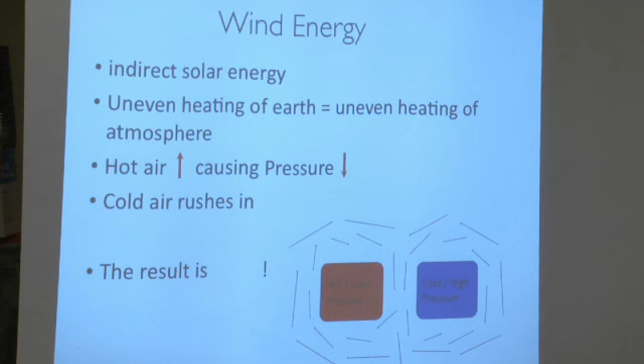So that's what's going on there. And a lot of confusion sometimes happens - a lot of people see these turbines, or not turbines, but mills on farms, and it's confusing. Like, what's this versus this? Is this just a junky version of this?

The difference is, if it's a mill, it's extracting mechanical power, versus a turbine extracting electrical power. So these mills are very high torque devices that move relatively slowly in terms of rotation and are used to do things like pump water or grind grain.

They've been around forever. They're still really common in the US and many places for pumping water. If you drive across the country, you'll see these everywhere. And they're still in use - much cheaper to build a mill than a turbine because you're going from mechanical work to mechanical work. That's very direct and much cheaper than the extra steps to get from mechanical work to electric power generation.

So a wind turbine, in contrast, is electrical power. They've been around a long time too, but not for most of humanity - long time. And again, they're going to be moving very quickly at much lower torque.

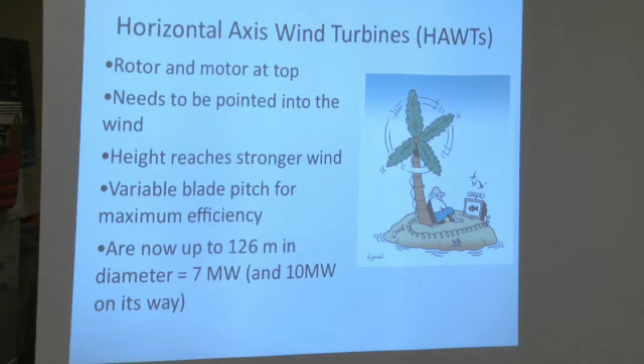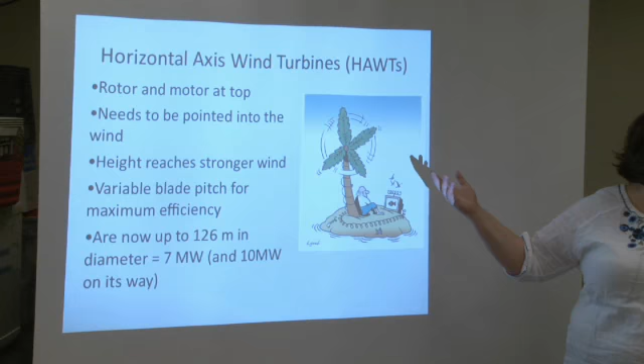So wind turbines I'm going to focus on, but I will go back to windmills a little bit at the end. You have two types: horizontal and vertical axis. The horizontal axis is what you're used to seeing around here, and what's in the news a lot, because they can go to much higher heights, and wind is much better the higher you go, basically. So the horizontal wind axis turbines are the more common thing, at least in my knowledge, before I started doing any research into them.

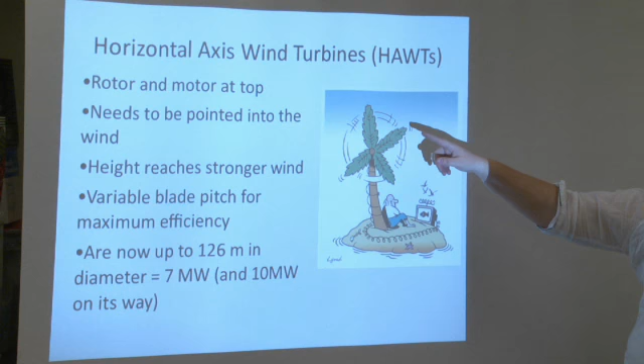So there's the rotor and the motor at the top. It has to point into the wind. The higher you go, the better, but you can imagine the higher you go adds costs and difficulty. You often try to change your blade pitch to maximize efficiency, because depending on how fast the wind is, you want a different blade pitch. And they're now really insanely huge.

Some of the challenges you can imagine in building this thing is just getting all the materials to the site, because you're probably not going to build your manufacturing plant where you build your long blade right on the site where you're going to install your turbine. So then you have to get your blade there, and you're actually limited by the size of a train railroad car or a large truck or whatever. So there's all these crazy limits when you're getting up to be this enormous.

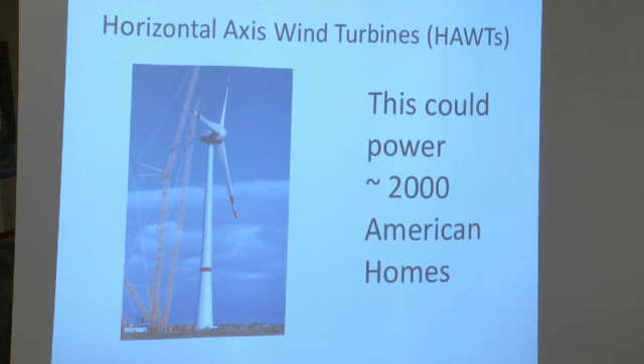So it's kind of remarkable and challenging, and this is of a scale that we're not going to be touching, of course, but it's nice to sort of see the extreme of what is out there. This is a 7 megawatt turbine that's actually running now, I believe, and they're currently building a 10 megawatt that'll be in production in a year or two. So that's a pretty big jump, 7 to 10. Yeah, it's definitely an area that's taking off.

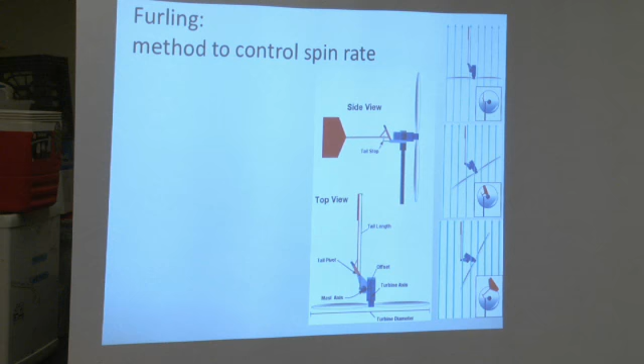One thing to think about is the need to control the spin rate. On days where there's not much wind, you might want to change the pitch of the blade to make sure you're maximizing the wind you're capturing. But on hurricane days, you have to make sure that your wind turbine doesn't completely just spin out of control. And so this is a really nice, relatively simple way to do it.

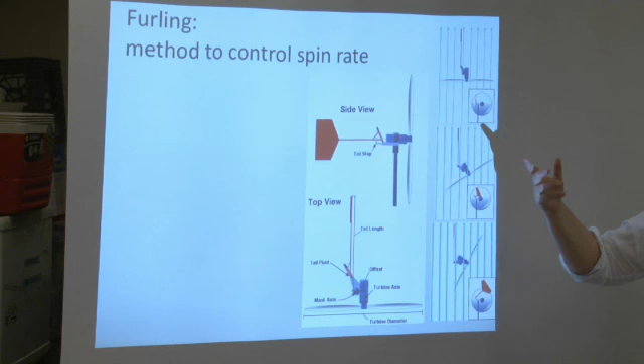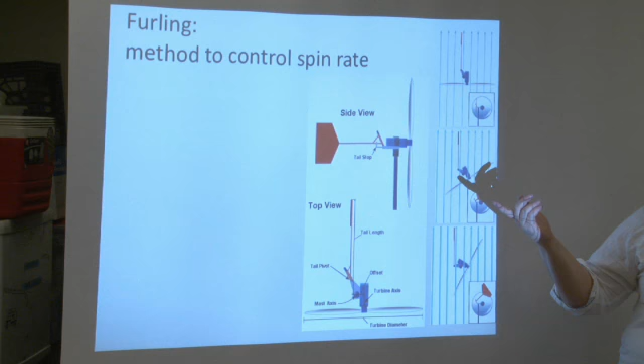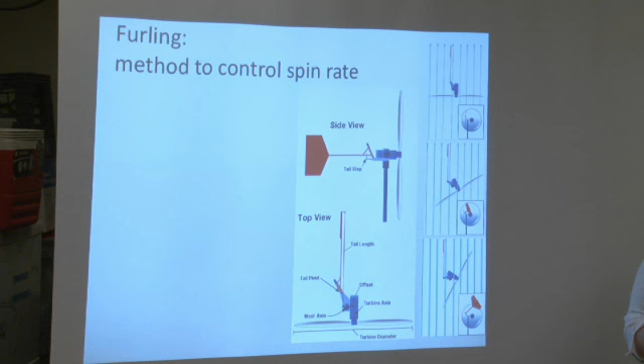So you can do it mechanically, electrically, or manually. Old wind turbines from windmills 100 or 200 years ago, there was some poor guy whose job it was to turn the turbine into the mill, into the wind or not, depending on how fast it was. Thankfully, there's been ways to optimize that either mechanically or electrically.

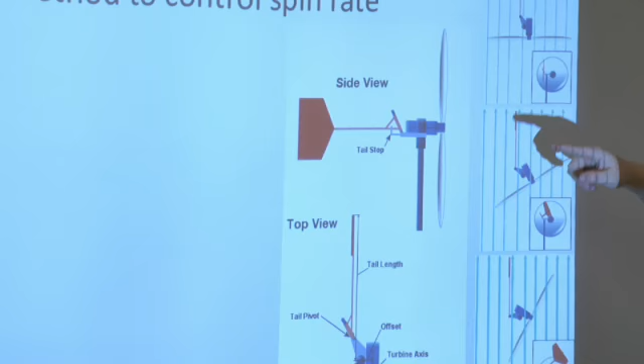This is a method where basically the weight of the tail and the turbine allows the tail to stay connected to the turbine - I'm getting lots of confused faces, so I'll go slowly. The turbine generally has a tail that's exactly perpendicular, so this plane and the plane of the tail are perpendicular.

So that the tail makes sure it's always pointing into the wind, which is what you want, except when you're going too fast. Now you need the tail and the front of the turbine to not be perpendicular, but hypothetically, if you're in gales, you need it to be completely rotated, so that the wind is just passing by the turbine.

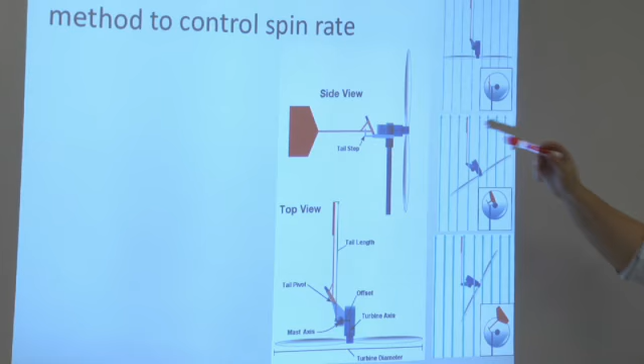Or if you're in a moderate wind where it's too fast for the turbine but still usable, you want it to be off a little bit. The way this works is that when the wind speed gets high enough, you get some lift in either the tail or the turbine - I forget how it operates exactly - and that allows this tail stop to be disengaged.

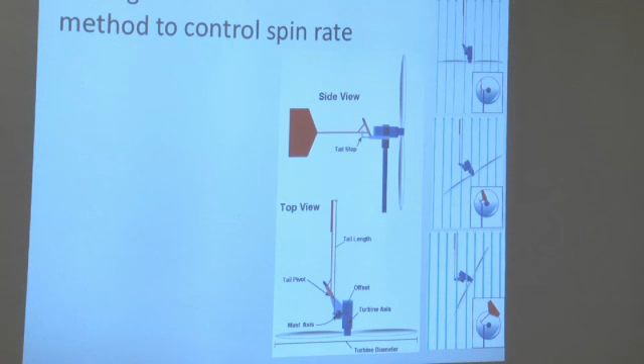So then the turbine rotates a little bit, which you can see from this top view - these are the front views, and this is the top view. The turbine rotates a little bit, and then the weight balances out, so the stop engages again, and it maintains this angle of orientation. Then if the wind speed gets even higher, the weights will get out of balance again, things will lift, and the stop will disengage.

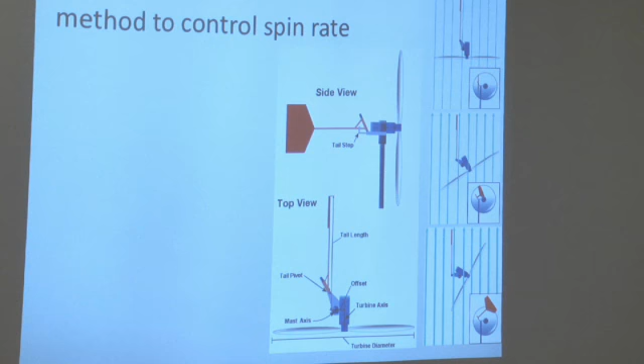So it's a really cool system to keep your device safe. And there's a lot of them out there.

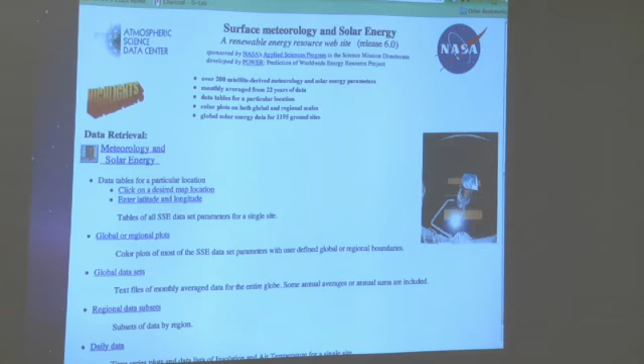And so I just wanted to show an example of what happens when you don't include that, or don't do it right. So watch carefully.

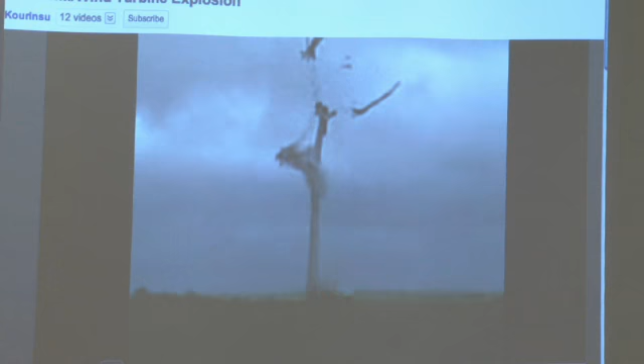So what happened, did the blade just fall off? It rotated so fast that I believe one of the blades broke off, and once one breaks, the whole thing is totally out of balance and falls apart. It's moving at such fast speed that really crazy dynamics are going on.

So there are really solid reasons to design these right, especially at big scale. But even at small scale, you can imagine in a hurricane it's not going to be safe to be near, and the small ones are often near people.

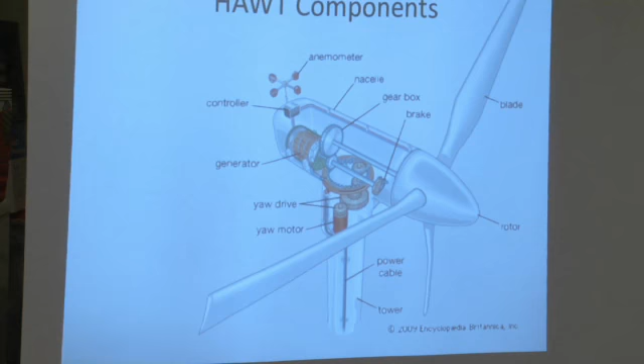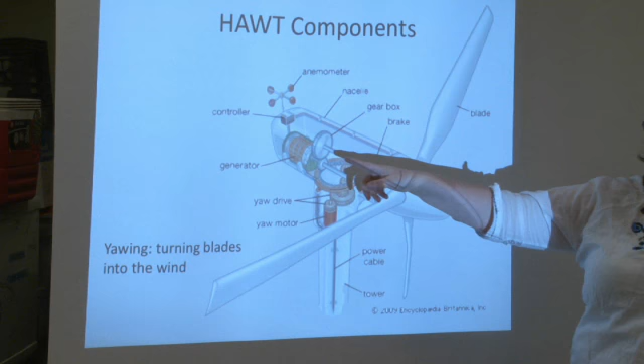So the typical components of a wind turbine: you have your rotor, your blades, and a brake, because you want the turbine turning at a certain speed ideally, so you may need to provide braking before providing rotation out of the wind. That's another smaller step you can take. You have a gearbox to get the speed to the right speed to power your generator.

Typically on a fancier wind turbine, there's an anemometer that provides the electrical control with yaw drives and motors to rotate the turbine into or out of the wind to maximize its speed, and then your tower. All the electricity is generated in this part of the body, and the power goes down the tower.

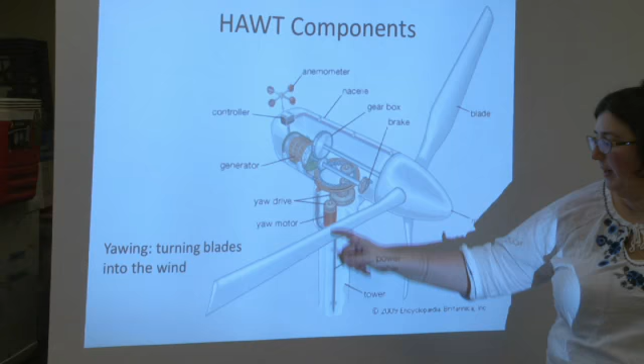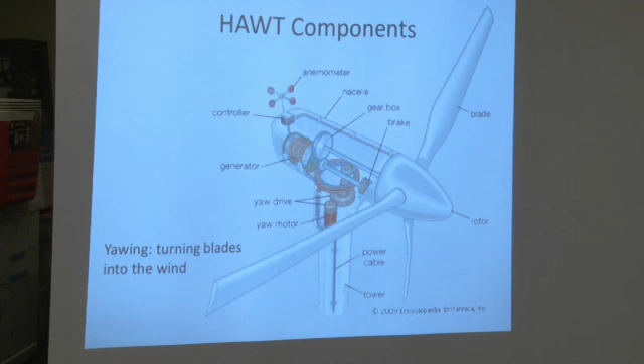You can imagine the challenge when you need to do maintenance on something really high up. So the smaller turbines we'll be looking at are all on guy wires and a pivot, so you can rotate them down instead of climbing up to do maintenance, because that requires a much sturdier tower and is a much more dangerous job.

Some installation considerations that one would think would be obvious but aren't always. This is a wind turbine installed basically on a rooftop, near some trees, so it's got two types of objects blocking the wind entirely. This was a many-thousand-dollar installation that's probably providing zero electricity, because the wind may be sufficient 30 meters up, but right there it's never going to be sufficient.

30 meters, or 30 feet—a good rule of thumb is you want your turbine to be 30 feet above any obstruction within 300 feet. Obstructions include things like houses, plants, and anything else that might be in the way.

Next up is vertical axis wind turbines. You can see there's a huge range of them, and you probably haven't seen most of these in production because they don't have the same efficiencies and benefits that horizontal axis wind turbines have, but they're a whole lot cheaper and easier to build, so for small scale solutions they can be really ideal.

There are a bunch of different names for these types. For example, this is called a Darrieus wind turbine. This is a Savonius wind turbine, which you'll be building on Friday. And this is a cool combo Savonius-Darrieus. The Savonius will start up automatically in wind, and the Darrieus won't, but the Darrieus gets a bit better efficiency, so combining them gets you the best of both worlds, with some drawbacks too.

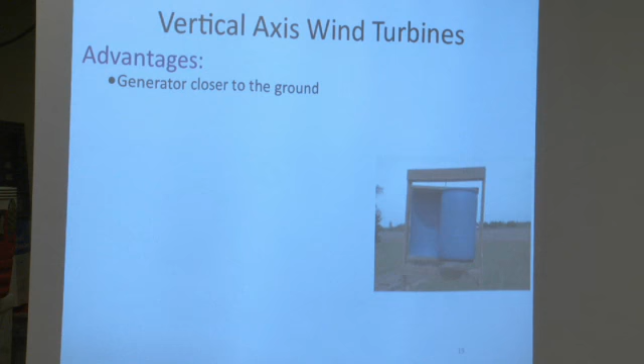So these power traffic lights in Taiwan. There are places where these are installed effectively, and they're kind of cool, because as you can see here, you can almost build them out of anything, and you will build them out of anything on Friday.

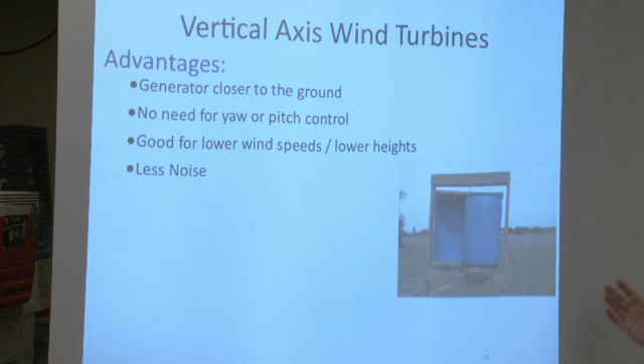Some advantages: they're close to the ground, so you don't have line losses compared to horizontal axis wind turbines. You don't need any yaw or pitch control because they're just in the wind—they're intended to be in the wind, and that works. They work generally for lower wind speeds, which means lower heights. They're often much less noisy than horizontal axis wind turbines, and they can often start at lower speeds.

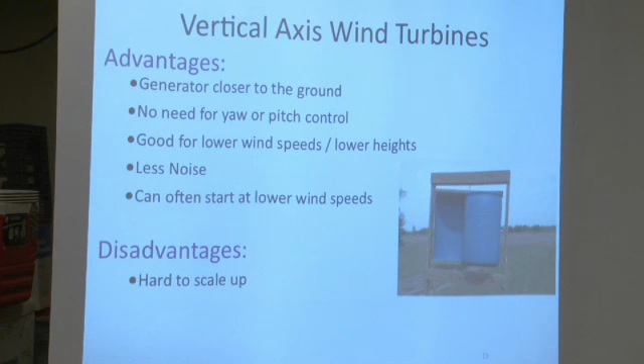Some of the disadvantages: they're hard to scale up. You're never going to get a 7 megawatt vertical axis wind turbine - that's just not viable. They're generally less efficient, and they're more prone to fatigue, so they wear out more easily because they're capturing so much more of the wind typically. But for our purposes, they're definitely a possibility to look at.

Just a reminder of the equations we're thinking about. The power you're receiving is equivalent to 1/2 times rho times A times v cubed. So v is the velocity of the wind, A is the cross-sectional area swept, and rho is the density of the wind.

The maximum possible power extraction is dominated by the velocity cubed. So your wind velocity is really what you worry about when you're designing. Area is important, obviously, but since velocity is cubed, the wind speed is huge.

Whenever you're thinking, is this a place where a wind turbine is appropriate, the first question is: what's the wind speed? And then there's a coefficient of performance, which reflects the reality that wind turbines are not perfect. There's a hypothetical limit - if you Google the Betz limit, you can find the proof, which is kind of cool - of almost 0.6 as your hypothetical maximum efficiency.

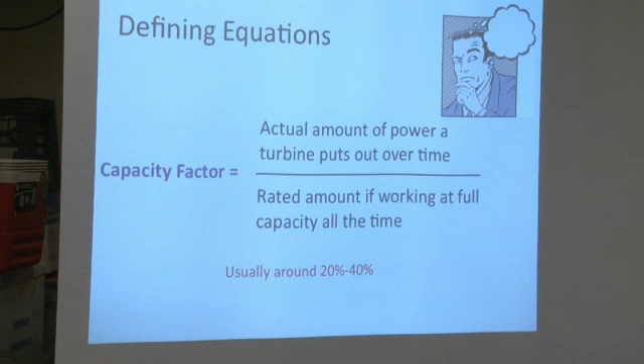The other equation to think about is the capacity factor. I've seen some websites say wind is so much better than solar because wind is 24/7. Well, not really - unless you're getting way up into the atmosphere, and even then there's a lot of variation. Wind is not 24/7; there's a tremendous amount of variation. Generally 20 to 40% of the time is how often your turbine is generating power, which is starting to sound more like solar actually. That's one thing to definitely keep in mind.

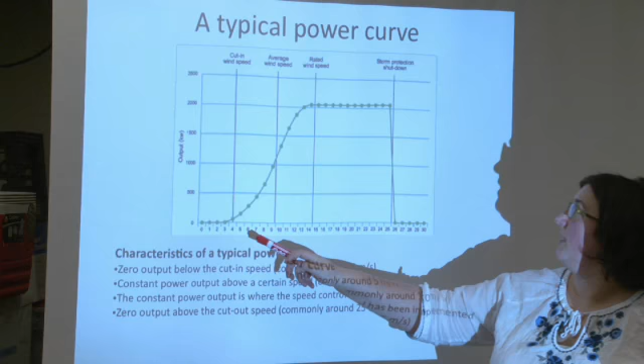Okay, so a typical power curve: at some given speed is when the turbine starts actually turning, because up until then it can't physically turn since the wind forces aren't high enough. Your output in terms of power is very, very low at first. Then you have an average wind speed generally somewhere around here, which gives you half of the wind power, or the power that you'd like.

Then you have a rated wind speed, and then you're happy, and then at some point it gets so high that you have to shut the turbine down, or else you're in trouble. So that's just a good general way to think about what's happening over different speeds, because I'll show you later we're going to look at data that shows the different speeds.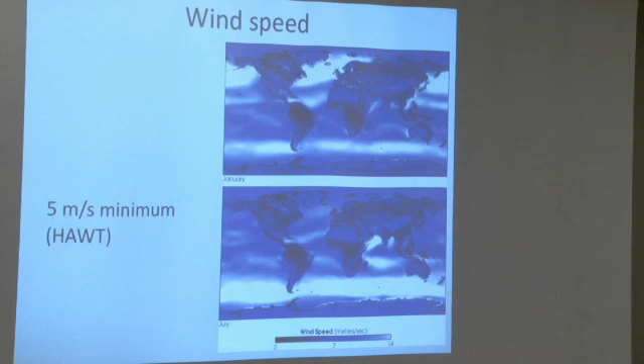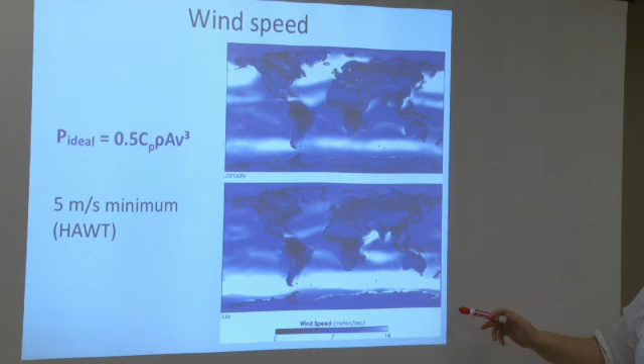These are maps from NASA that show wind speed across the entire globe. If it's very dark, it's very low wind speed, and if it's very light, it's higher wind speed. If we could just fill this part of the ocean with wind turbines, that would be pretty sweet. But you can actually see in Nicaragua, right over here, you're getting pretty decent wind compared to, say, these parts of Africa or up here in Russia, where we wouldn't be thinking wind turbines at all.

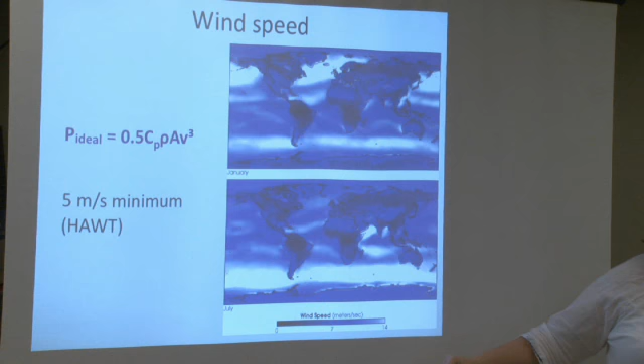You can see how much variation there is between January and July, so there's a lot of seasonal variation no matter what. This blue is 7 meters per second, which is getting to be useful. For a horizontal axis wind turbine, you need 5 meters per second. For vertical, you can go a little bit lower, but 5 is a good rule of thumb.

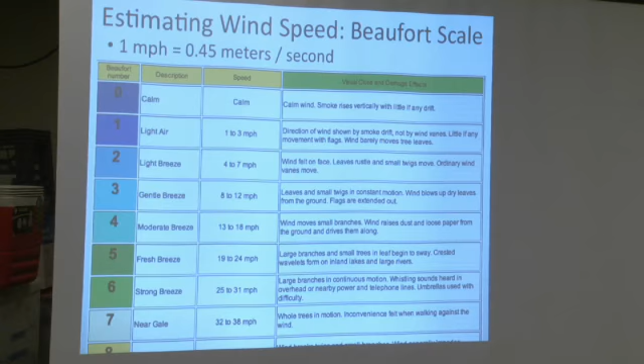Again, why we're looking at velocity over everything else is because velocity is cubed for your power equation. So, I've told you wind speeds, I've shown you a NASA map of the entire Earth, but that doesn't tell you much for a given location.

So one way to get a really rough estimate of wind speed is this Beaufort Scale, which was developed in the 1800s, and it correlates what you can visually see and what kind of damage you're seeing to the speed. Some caveats: number one, it's pretty rough, and especially if you're talking to people in a community asking about wind speed and giving them examples, it's hard to remember exactly what the wind is like. Can you tell me what the Beaufort Scale was today walking here?

I can't, I don't remember, I don't really pay attention to the wind that much. If you're working with farmers, they're probably a little bit more aware of it than you and I might be, but still it's challenging. The other thing is that a lot of these metrics are on the ground, and we're probably talking about significantly higher than the ground, depending on what kind of turbine you're implementing.

And so that only helps you so much. If you're finding out that you're probably at 4 miles an hour, which is 2 meters per second, and really low, but that's at the very ground level, and you're building a turbine that's 10 meters up, maybe 30 feet up, maybe you have a shot of getting enough wind.

Is there like a uniform scale from what the wind speed is at ground level to how it changes vertically? Or is that a regional thing? Well, so it's both.

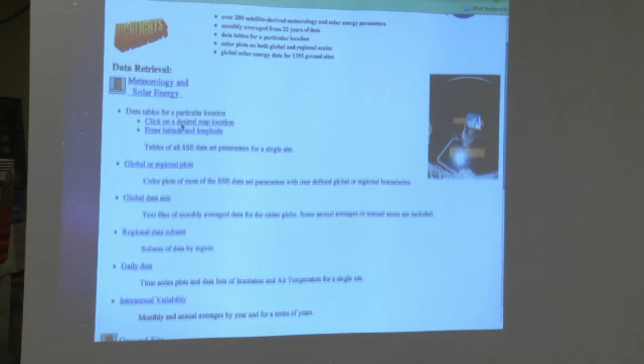You go to this website with that awful link, and there's a bunch of different ways to get this data. This is actually useful for both solar and wind. So if you're worrying about solar data too, this is really useful. If you don't know your latitude and longitude, you can use the map to click. Every time you do this, you have to log in, but it's very easy to join because you just type your password twice instead of once to become a member.

And then it's slow, but it looks so clunky that I was afraid you'd be turned off by it, and it has good enough data that I wanted to go through showing you it. So you have this map of the Earth, you click in the part of the Earth that you care about to center it, and you click to zoom. We're in the wrong part of the world, but we're getting there. I'm going to zoom in again. All right, and you can see this is data for a region, not for a small town. So there's all sorts of limits to this data, but it's useful.

Now you can finally get your data, and now you can get crazy information. So parameters for solar cooking, for solar panels, cloud information, which can be really useful, temperature, which can be really useful, and now we're getting to wind. So you can see the variety—you can get 50 meter and 10 meter data, but because this is all satellite data or airport data, 50 meters is pretty high for anything we're talking about, and 10 meters is for terrain similar to the airport, because they're measuring at the airport where they have anemometers.

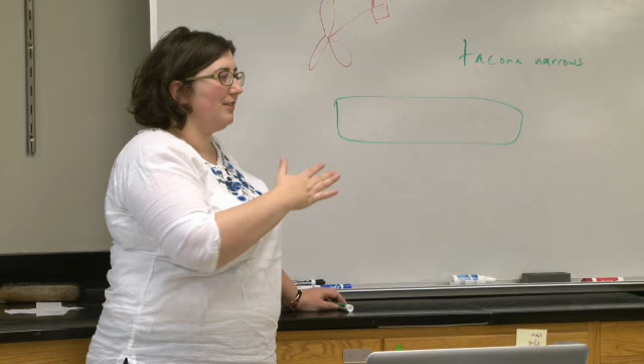It is totally scary, especially because I have a friend who did some research into it. This bridge, there's a super long bridge, and it just had natural frequencies at the same rate as the wind was often blowing, and so the bridge would just go up and down crazily, and eventually one day it got so bad that it completely broke apart. The crazy thing is that people used to hang out on the bridge on the really windy days because it was so fun, like a roller coaster. So it's extra scary thinking about that.

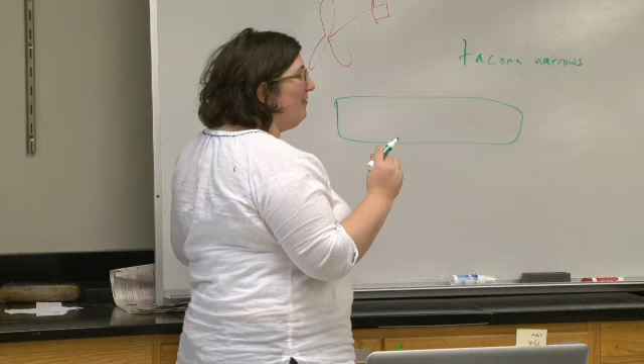Anyway, this was the inspiration for the Humdinger, which has a really tightly pulled belt in the middle of a support structure, so that the wind is going perpendicular to the belt, which hits the natural frequencies of the belt and causes it to vibrate. Then you just have some magnets next to a coil on the corner that allow you to generate electricity.

For certain applications, this can be a really low cost way to provide electricity. This is a relatively fancy way of building it, but you can imagine, and they have, building it out of PVC pipe, which you can get anywhere, and building it really simply. Because there are very few moving parts and nothing rotating, it's much easier to build than even a vertical axis wind turbine. It's a really neat application, and hypothetically you could imagine building it into structures like railings on buildings and stuff, in order to power different things. This is one example, and we have at least a couple at D-Lab, so we'll make sure to show you them later today or tomorrow.

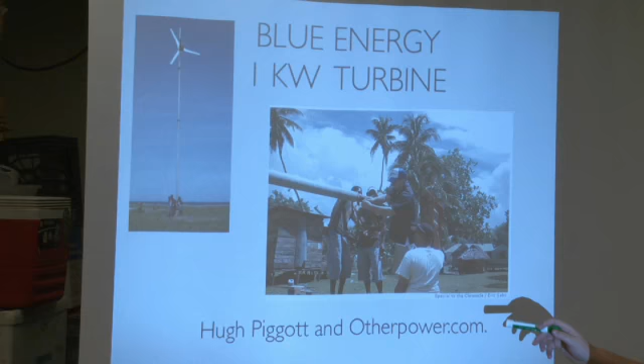Another example is the sort of classic wind turbine in developing countries, designed by Hugh Piggott. These are pictures of work being done at Blue Energy, in Bluefields, Nicaragua, which we worked with last year. They build all these turbines - you can see the support wires, and that you can rotate the turbine down so that you can do maintenance on it, which is a really nice feature. That's one classic design that's pretty common in developing countries.

And then a lot of people have heard of William Kamkwamba. Oh, there's the wind belt - so let me go back to that.

So I'll pass this around, and the belt is not exactly taut at the moment, but you can see the magnet on the belt that goes against the coil, and that's really all there is to it. Then there's a little bit of circuitry in order to generate power, which is a really simple way to do things. So what's the idea? The wind goes through the tape there, and the tape vibrates because it hits natural frequencies, and the vibration allows you to generate electricity. This movement is all you need.

So William Kamkwamba was this guy. Where did he live? In Malawi. He just got really interested in how he could get electricity at his house, went to the library, read a bunch of books, got inspired, and built his own wind turbine, which doesn't look like your traditional wind turbine. There are a few design improvements that could be made, especially with better resources, but it worked well enough for him to power a radio at his house and charge cell phones, which got people really excited, so then they would start paying him so he could start building more and more turbines. It's a really cool story, and now he's at Dartmouth in school, which he never could have done had he not built this turbine. So he's a cool guy.

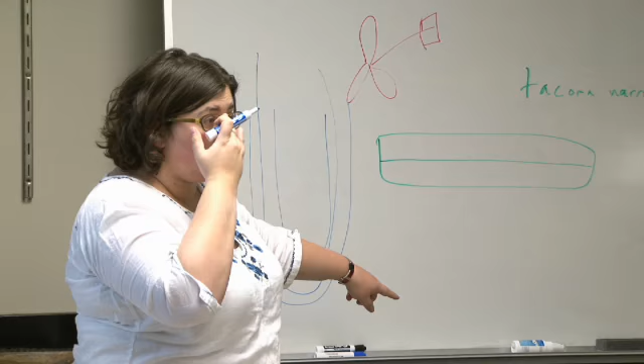So there's a rope pump here, and the way a rope pump works is incredibly simple. You just have a rope inside a tube that goes down into the water table, so that you're getting water through holes in the tube. Then you either have knots in the rope, or if you can find them, rubber washers, like every foot along the tube. This is obviously not to scale in any way. The water gets trapped between the washers, and you pull up the water that way. This is really simple. Again, we're talking about ridiculously low efficiencies, but if you need to irrigate, this is a way to do it that just uses the wind and works really well. This was built for $40, which is ridiculously inexpensive compared to even a Hugh Piggott wind turbine, which is in the thousands of dollars.

So there are opportunities for a whole range of possibilities, and there are just so many different types out there. If you look into it, wind is one of the areas where people get really excited and like to build their own stuff, so you can see a huge variety of designs in the world. That's wind in a very fast nutshell. Are there any questions about that?

Okay, so next is MicroHydro. MicroHydro is kind of funny because it's harder to find really good examples of installations in the developing world, because they tend to be just built but not well documented, is what I'm finding. So I'm going to talk more about how you would determine if a MicroHydro installation would be appropriate, and I don't have as many good examples of successful installations, but they're certainly out there. Hydropower is just using the gravitational flow of water to generate power, considering the two terms I'm going to use, head and flow rate. Head is the distance that the water falls, and flow rate is how quickly the water is moving.

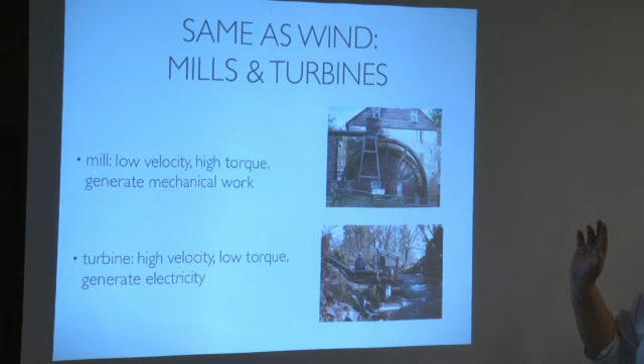With water power, it's the same as wind in terms of there being mills and turbines. Think of old grist mills and other things you can still see in parts of New England. They're low velocity, high torque, delivering mechanical power directly, as opposed to a turbine, which is much higher velocity, much lower torque, allowing you to generate electricity. Those are the two extremes.

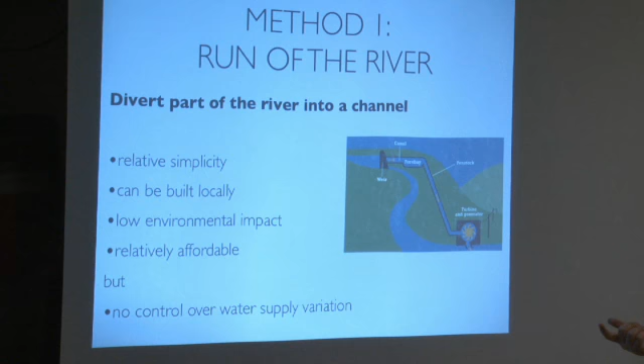In terms of hydropower, there are two methods. One is called run of the river, meaning you take a chunk of the river and siphon it off into a tube that goes directly into your turbine. The other option is a dam. The benefits of run of the river are that it's relatively simple - you can build it locally, compared to a dam which is much harder to build generally. It's comparatively much lower environmental impact than a dam, and relatively affordable. But when you have a drought, you don't have any storage like you have with a dam, so that's the drawback.

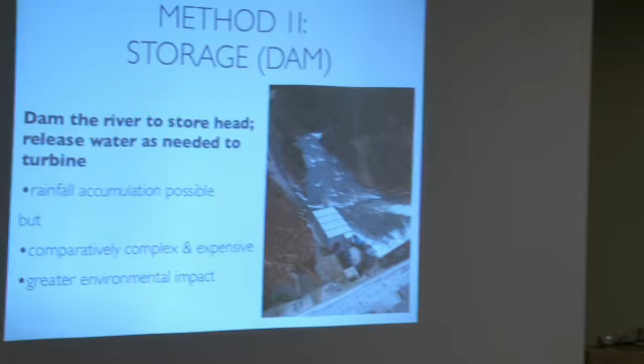The dam is the reverse - you can accumulate your rainfall, which is great, but it's relatively expensive, and there's a greater negative environmental impact, because damming up water affects the local environment, from the fish to what the fields look like, et cetera. I'm sure you've heard of dams in China or similar that have destroyed many entire communities for building dams on a very large scale. There's also more maintenance associated with the dam in terms of silt accumulation.

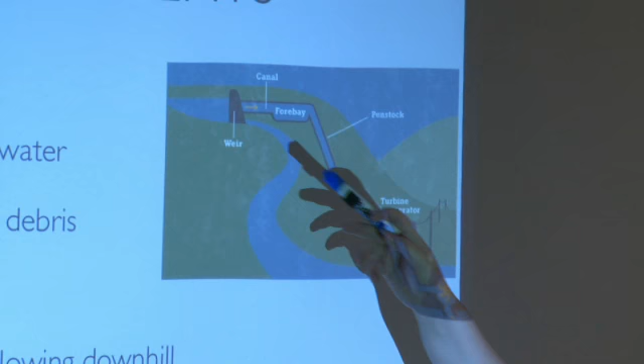It's challenging, so we're just going to talk about the run-of-the-river model. The components you have: a weir that diverts a chunk of the water into your tube. You generally have a settling basin so that any debris settles out, because you don't want it going into your turbine - you'll destroy your turbine. A forebay, which is a small holding tank, gives you reserve capacity, but that's talking about variation on the order of seconds or minutes, not days or months.

Penstock, which is a closed pipe flowing downhill that feeds directly into your turbine that then generates your electricity, and then the water is returned back to the river. There are a lot of different turbine types.

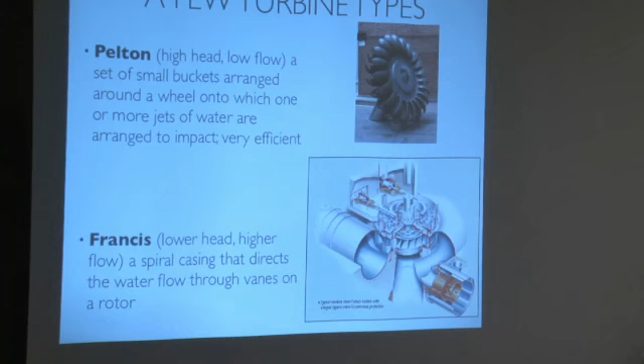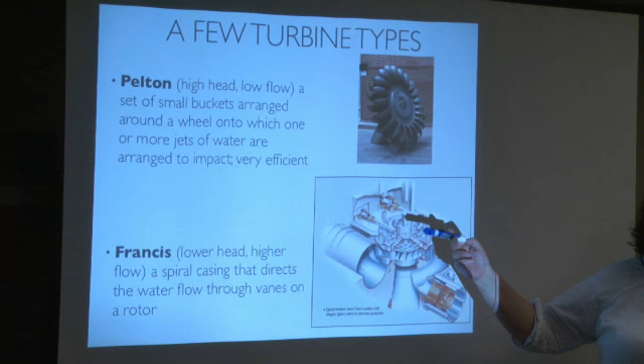One of the most efficient, if not the most efficient, is called a Pelton Wheel. You can see it's got a relatively complex geometry, so it's relatively expensive and challenging to build. But if you do, it's very efficient. It works well for a high head, low flow situation - head being how far the water is dropping.

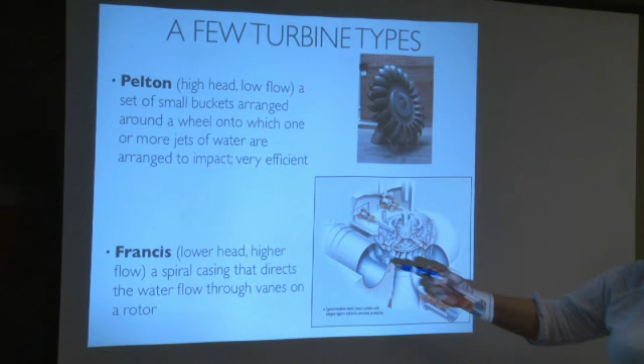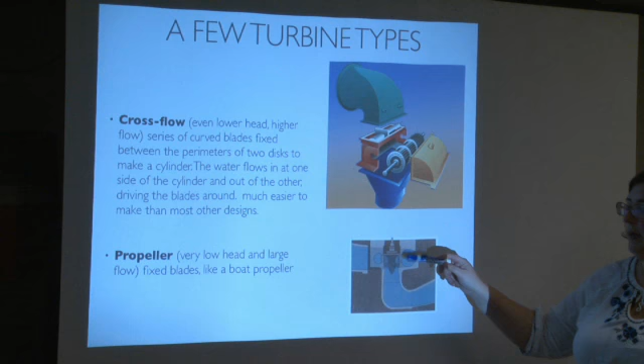Francis wheels work better for lower head, higher flow, with a spiral casing where the water comes in and spins the turbine, then comes out. Cross flow, where the water flows over a cylinder with a bunch of blades on it, spins the shaft to generate electricity. A propeller literally uses a ship's propeller, but instead of it being powered to move the boat, it's used in the exact opposite way.

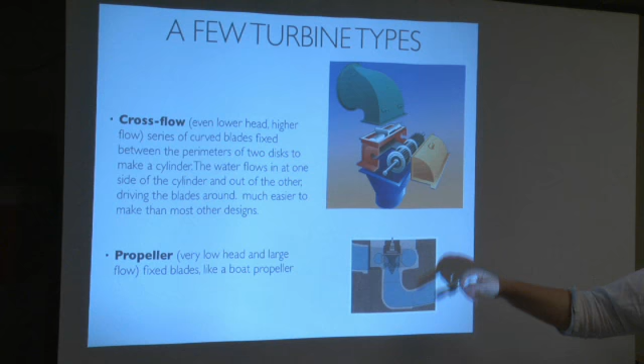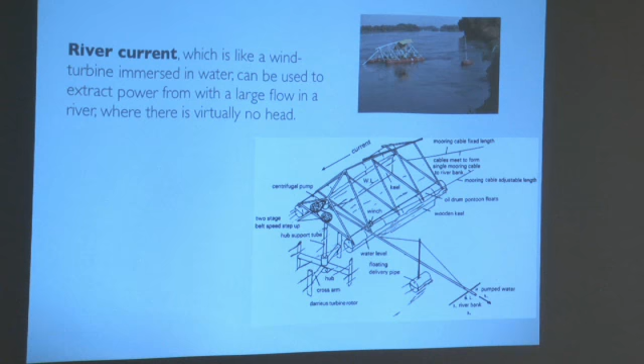You need different types of turbines for different flow and head situations. One example is just literally putting something in the river, skipping the filtering and siphoning, just putting something on top of the water - which seems really simple and great until you think about all the challenges in terms of flooding and debris in the water, et cetera. This is a device that is really prone to failure, but it works in areas where that's your only option, or it can work.

Some of the considerations you need for microhydro: the minimum head and flow you need is 3 feet of head and 20 gallons per minute of flow.

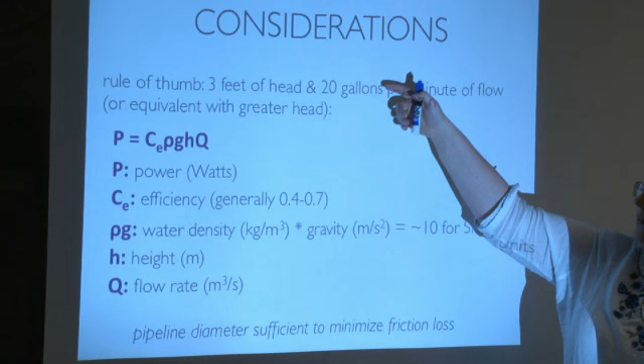So that would be the minimum head you need. If you have more head, either as a bonus you get more power, or you can have reduced flow, because the power equation here is a coefficient of efficiency times the water density and gravity times the height, which is your head, and Q, which is your flow rate. So you can see that H times Q you can keep constant. If you increase your head, you can lower your flow and keep your power constant.

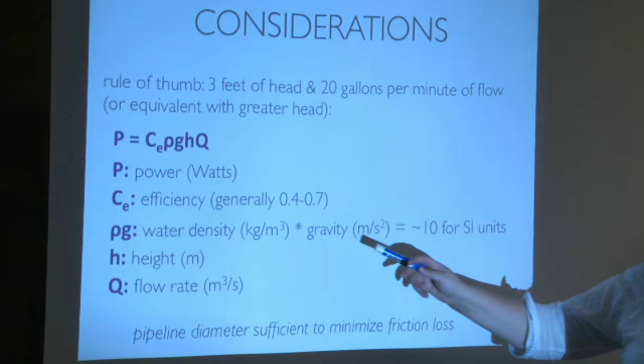One nice rule of thumb is if you stick with SI units, rho times G is about 10. So you can just plug that in rather than having to remember the density of water and gravity, though in SI units that's relatively easy, but 10 is a nice way to just remember it. And then efficiency is generally somewhere between 40 and 70%.

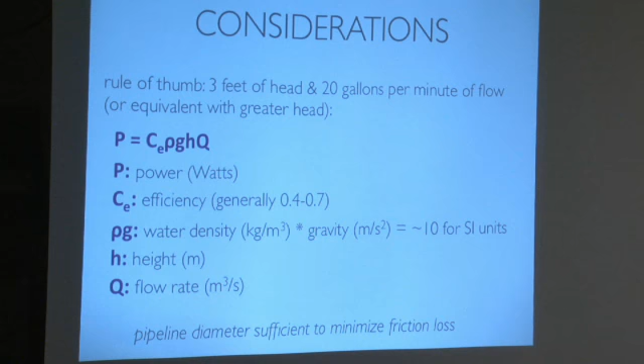One other thing to think about is your penstock, which is the water going through the pipe to get from the top of the river down to your generator. If your pipe diameter is too small, you're going to have frictional losses in the pipe that dominate and slow your water down so much that it's problematic. So that's another thing to remember, because it's tempting to use small diameter pipe for a variety of reasons, but that's dangerous.

So how do you figure out if a river is appropriate for using MicroHydro? The two things you need to know, again, are flow and head.

So the simplest method I can find for measuring flow is called a float method. You can imagine actually doing this in a river would be challenging, so it's not trivial, but it is possible. You mark about 100 feet along a length that's ideally straight with uniform width and depth, which is comical to find in a river, right? I've never found a river that has 100 feet of uniform width and depth, but you do your best. Then you calculate your cross-sectional area, A.

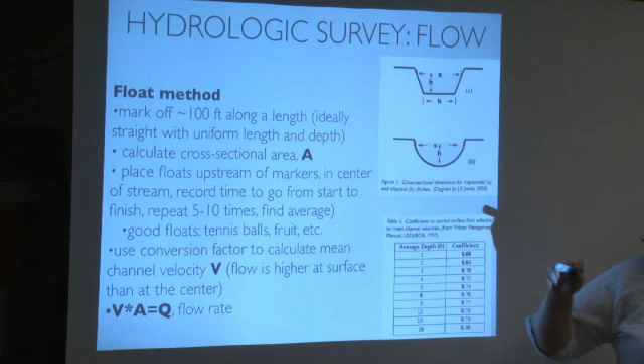People usually model it as a semicircle or a trapezoid or even just a rectangle. Calculate that cross-sectional area. You place a marker at the start and end of your 100 feet, and then you put floats in the river at the center of the stream and time them to find out how long it takes for them to get from one end to the other.

If you want to get complicated, you can put floats at different points and levels to worry about friction losses, but you don't actually have to do that to get a ballpark measurement. You can just do it in the center. And good floats could be a tennis ball, an apple, or whatever you can find that floats. You do have to use a conversion factor because your water's flowing faster at the top than in the center, because of the friction associated with the base of the river. So you use a coefficient to correct, and then you get your flow rate. Yay!

So that was a lot of work, and all you have is a flow rate for one day. Water flow rate varies tremendously during the season. So again, you can do your 10-year study, or you can just get some data on annual precipitation and when the rainy season and dry season are, and do your best to estimate. But yeah, that's how you'd get your flow rate.

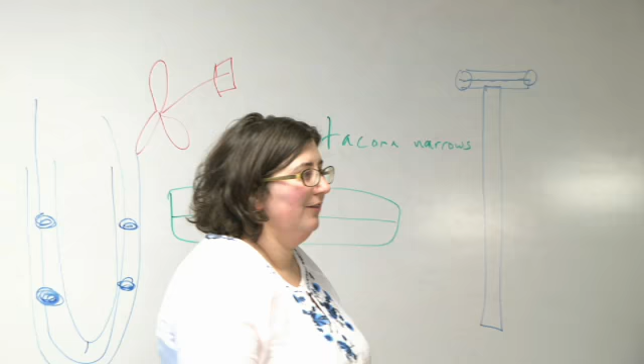In terms of head, the simplest method I found is you take a yardstick or a stick of known length, it doesn't need to be a yardstick, and you put on it a clear tube with the ends capped, half full of water, which is basically a really cheap level. Or you can get a real level if you have one, but if you don't, you can just use the cheap version.

Then, hopefully with two people, you put the stick at the bottom or top and keep moving it over and over again until you measure your head, which is a pain, but people do it and it works. Actual surveying equipment is really expensive, so you're unlikely to have that in the field.

So if a community partner asks about this, you have a method to measure that's plausible. Sorry, I thought the head was the drop into water.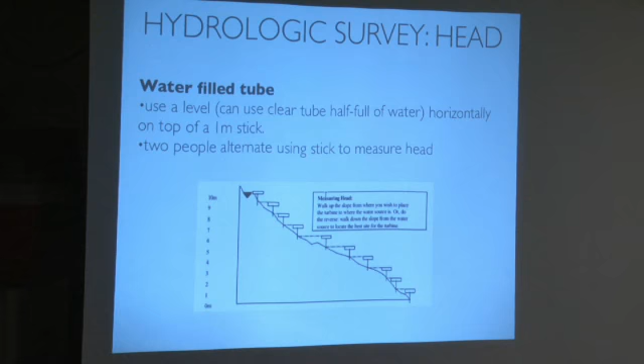Right, so you're putting this in the river perpendicular to the water flowing through. For the flow measurement, you're putting your floats in the water and watching how long it takes to get from one end to the other, and that'll give you a measure of flow.

And then your river ideally is, let me get a picture instead of trying to draw a bad picture. So your river is hypothetically going down the mountain here and doing a curve. And so you're saying, okay, I'm gonna put my weir up here, and I'm gonna put my location where I'm actually going to generate the power down here.

So I need to calculate the height from right here to get my head height. So now I need to very painfully go up the mountain in order to figure out exactly how high this distance is. Does that clear it up? Okay.

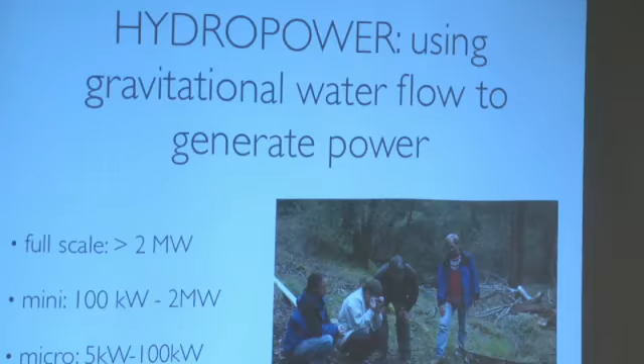So that wraps up MicroHydro. Are there any questions in addition?

Okay, so trip. I want to start talking about the trip and spend actually the rest of the time talking about it. So let's do that.

So one change is that one group of students is going to go to El Salvador now instead of Nicaragua. And the reason for that is Amy Smith just came back from a trip to El Salvador where she found a community partner that's really interested in us, and we think they're doing great work and are a solid connection.

So we decided to see if we could add Nicaragua or El Salvador, and we were able to in about 2 hours, which is remarkably fast compared to the months it takes to develop relationships with other community partners. So hopefully that's a good sign.

And they're really interested in charcoal, which is something you'll be trained in next week, so it just seemed like a good fit. You already know about this group, so I'll talk to you offline if you want about it. But yeah, we're excited to be working with them.

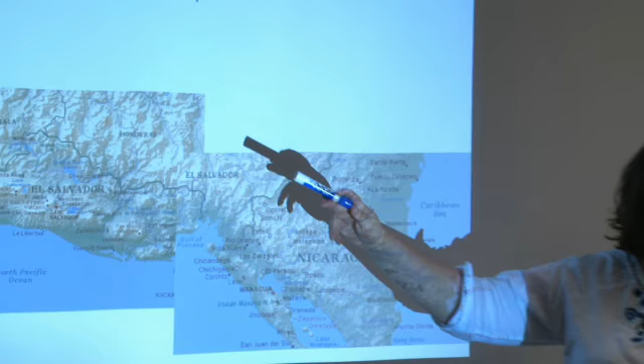So one group of students is going to be going to El Salvador, and then 2 teams will be going to Nicaragua. El Salvador doesn't border Nicaragua, but it's pretty close, so we're not that spread out yet. We're not approaching D-Lab development quite yet.

So the teams are as follows: ASAPROSAR will be going to... Bus, Rosser, and Brianna will be going to ASAPROSAR, and Carter, you'll be working with them for the start of the term.

I don't know if I've mentioned this, but the teams you go with and the projects you work on for the spring break trip may or may not be what you end up working on afterwards. What happens is the week after you get back from spring break, we figure out what projects are going to happen. You tell me what you prefer to work on, and some students are really psyched to stay on the project they went on spring break with, and naturally I'm going to try to make it possible for you to stay on the project you're really psyched about, especially if you're knowledgeable about it because you just went on a spring break trip.

But if for whatever reason you're like, you know, I can't stand ASAPROSAR, I don't want to work with them or any of their projects ever again, I'm not going to force you to stay on that. So there may be a little shuffling, especially for the people who aren't traveling, there's variation. And I'm pretty sure Eric has dropped the class, but if he hasn't, he would be on this group.

So the projects you're going to be working on: last year the students worked on the OJ bag sealer. One thing is delivering that bag sealer, which ideally means reading the final report from last year and learning how it works so you can show it to ASAPROSAR staff when you get there. That's sort of the servicey project as opposed to the investigative parts of the work. Then projects 1, 2, and 3 are the ones you'll be investigating.

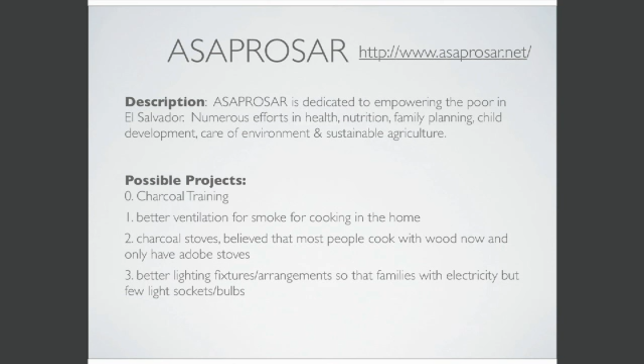Guess what? So yeah, we're excited about that project, and thanks to the people who are rolling with just being sent to a new country with very little notice.

So what do you have to do with all this? Right now, and by right now I mean in the next 2 hours, talk to me and do some brainstorming of ideas.

Your deliverable for this step is 2 annotated pictures from each team member. There are a lot of different deadlines for all these different things. I'm just trying to help you get through the next couple of weeks in a way that you actually get output and don't save it all to the last night, which will lead to really weak packing and help for your community partner. This is all hopefully in preparation so that you can maximize the value to you and your community partner for the spring break trip.

And for the people who aren't traveling, you're helping make sure they're maximizing their work, and it's also getting you prepared for doing the project work after spring break. So I don't think this is busy work for you in any way.

So that's one, doing a brainstorming effort, and I'm going to talk a little bit about brainstorming in a minute, so you have some guidelines there.

Pictures, you mean find examples of existing technology or do sketches? Just sketches. When you do a brainstorm, like if I was brainstorming wind turbines, I might do a picture that looks like that—takes me 10 seconds to draw.

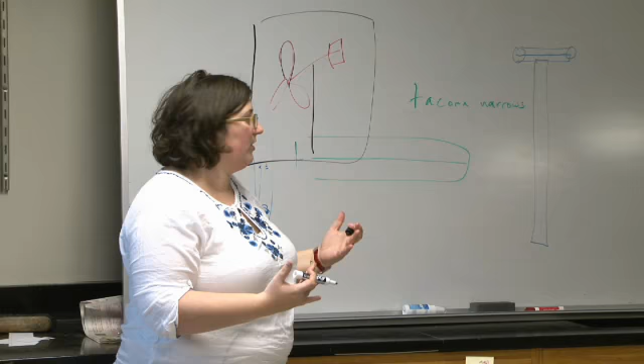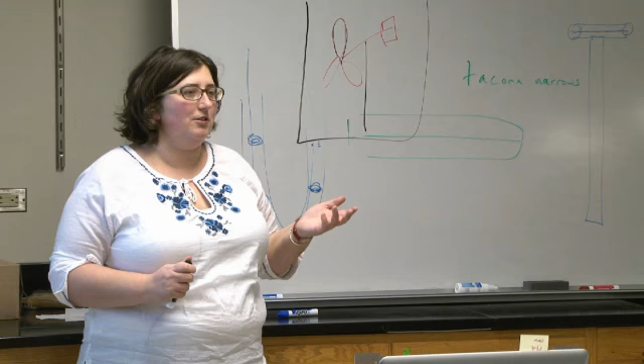Not many, if any of you, are artists or technical graphic designers, and so I'm not looking for an amazing sketch done by a graphic designer or artist. I'm not one either, but if you just draw relatively slowly and carefully, maybe do a couple tries, you should be able to get a drawing that looks decent enough that it's understandable, which is all I'm really looking for.

So the second thing is a literature search on the topic, which you may have time for as well. I want you to do a brainstorm initially just to get creative before you know what's out there necessarily. That's why we're doing the brainstorming first, but then a second set, which you may have time to do some today if you brought laptops, is to get some information on what's out there, so you're more informed about your project.

So what I think would be a good deliverable for this is an annotated bibliography, and there are guidelines right there on how to write an annotated bibliography.

The guidelines for annotated bibliographies are generally on the liberal arts side of things, and they talk about summarizing the content, reflecting on whether it was useful, and assessing the quality of the source. All those are good things, but basically I want you to focus on summarizing what was there and reflecting on how it's relevant to your project for each annotation, and assessing the quality of the source.

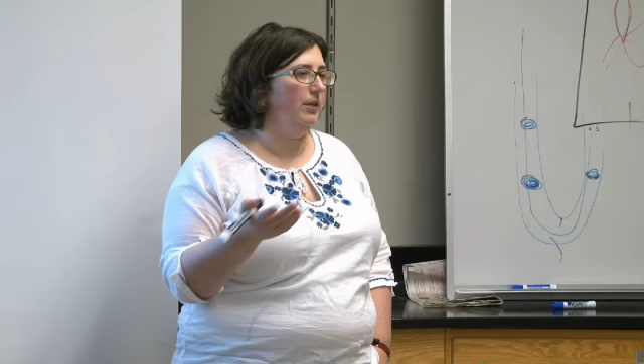Come up with the best guess so that when you talk to your community partner, who often don't have a lot of comfort with numbers and may give you really wacky numbers—if they're giving you numbers completely different from what you're expecting, that's a good indicator you need to keep asking questions, so either you learn your assumptions are totally off, which is important to learn, or that your community partner isn't really understanding the question or doesn't have the educational background to give you a useful number, and you have to work a few different ways to actually get to that number.

And we'll talk about that on the trip prep week, about how you actually do that process of getting that information.

And then the next aspect is doing a second brainstorm, and it's up to you as a team if you want to do this in two stages. Sometimes people like to brainstorm on their own for a bit and then come together and bring those ideas to a group brainstorm session, building on them further. Some people prefer just to do a group brainstorming session, so it's up to you.

But the second brainstorm should at least have a group component. For those, it's just two annotated pictures for each project, so it's fewer pictures because it's not per team member. You guys can figure out how you want to split those up.

Another thing is the big questions you have that you want to make sure you get answered, so keep those in mind and make sure by the end of the trip you've gotten answers. All of these questions relate to figuring out: can you actually work on this project? Is this a good project? And if you are going to work on it, what is the appropriate deliverable? That's the type of questions.

A materials list for the trip. You may well need some materials if you're going to do a charcoal demonstration, build a washing machine, or implement a prototype in the field. Your community partner needs to know so they can provide the materials, or we need to get them here so we can bring them down. You don't need this until the 16th, right before the trip, and that's only the last desperate time. If you can define them sooner, that's better, so your community partner has time to get them, or we have time to get them if you need help.

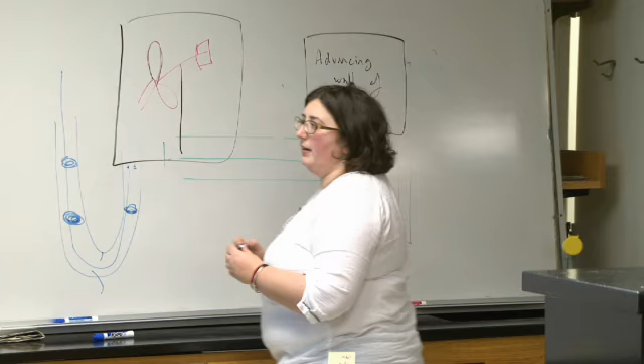So a lot of people, if they're brainstorming weapons of war, and you have your 8.5 by 11 piece of paper, might draw this. And I would say that this picture is a lot more evocative of what your idea is than using the words big and just a tiny drawing.

And those of us who are not so good at drawing, and I'm one of them, are tempted to draw really small because you don't want to show in really big format just how bad your drawing is. But even being a weak drawer, you can still get your idea across pretty well.

This is like a 3-minute sketch for an artist. So none of your brainstorm ideas are going to look this crafted. This might be the actual annotated sketch that you turn in, that you actually refine and spend some time on.

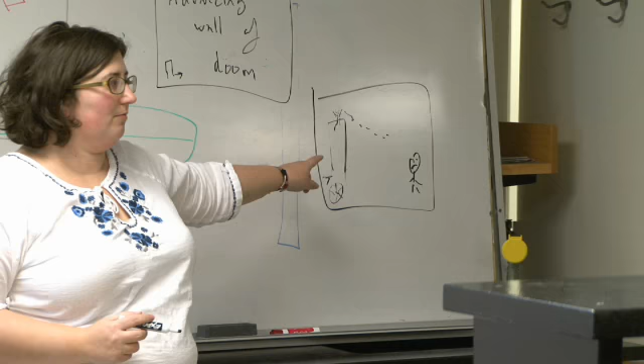So the 10-second version is going to be a guy, and you have a guy, and he's shooting stuff, and here's the person who's unhappy, getting shot at, and then here's the wheel that's moving your wall of doom, right? So this is a really fast version of that sketch, and that's what I'm looking for, not that.

But I just wanted to emphasize, most people start out doing this, and you really want to force yourself to do that with maybe the description at the top or the bottom, but the picture should dominate, not the words.

So I'm still a little confused as to how the 3 projects that you listed on each slide relate to the brainstorming and the sketches. Okay, yeah. So the 3 projects.

So if one of your projects was the feed chopper, right now you know nothing about that project, right? So you may not be able to brainstorm that at all until you come talk to me, which is part of what you need to do in the next hour and a half. Come talk to me, so I can give each team a little bit more detail about their 3 projects.

But one of them might be something you can brainstorm on initially if there's a queue to wait for me. But either way, once you know a little bit about the feed chopper, then that'll be one of your brainstorming assignments: the community partner needs this mechanization of the feed chopper, and let's brainstorm ways to mechanize that feed chopper.

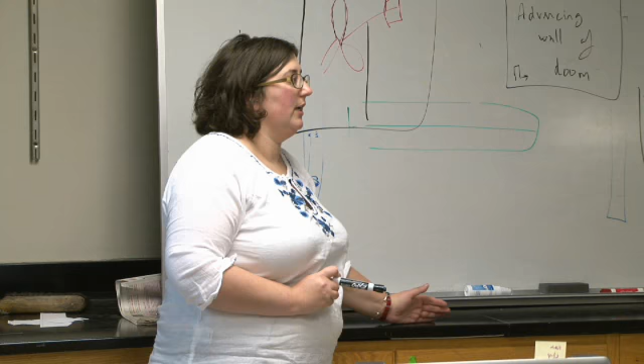Just put out as many ideas as you can in 15 minutes. And a good goal is to be generating like at least 3 ideas per minute, which doesn't sound like that many, but it's pretty challenging. But that is something to keep in your mind: I should be generating 3 ideas per minute. And if I'm not, I need to get crazier, probably, and less inhibited in order to successfully do it.

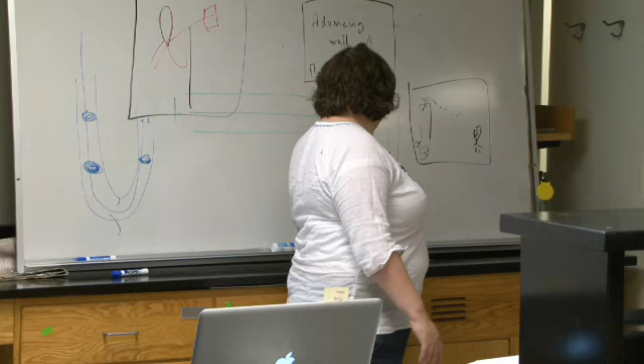And so once you draw this beautiful picture with your group, hopefully everyone's drawing, and you just say, hey guys, my idea is an advancing wall of doom. And then you grab a piece of tape, and we're going to use the 3 fume hoods as our boards. So each group will be around a fume hood. Just tape your idea up on the wall, and then get back on drawing.

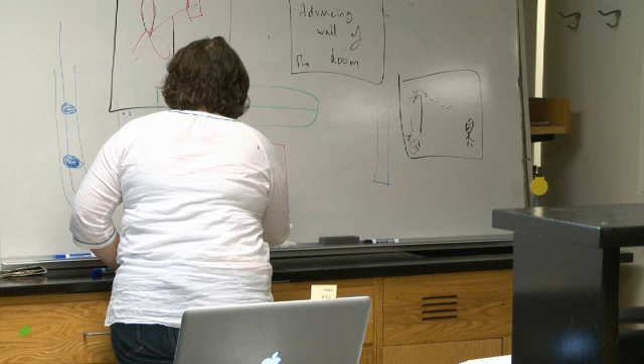So what are the rules of the game? One is deferred judgment. So when I propose that I want to make a wind turbine that's just going to float in the air magically with helium balloons, and you see a few flaws in that idea, you just have to bite your tongue. One way you can manage that is by saying, okay, I'm going to build on your idea, and instead of helium balloons, we're going to use a post that's attached to the ground.

But deferred judgment applies even to your own ideas and anyone else's. If you're showing your idea, don't say this is really stupid, just say what it is. Hopefully everyone is coming up with some really terrible ideas as well as really good ones, and some of those terrible ones have a kernel of awesomeness in them. That's why it's worth it to get them out.

One at a time. If everyone is talking at once, it's ineffective, so post them up one at a time. And you shouldn't draw like three ideas on one piece of paper. You should have each piece of paper for each idea.